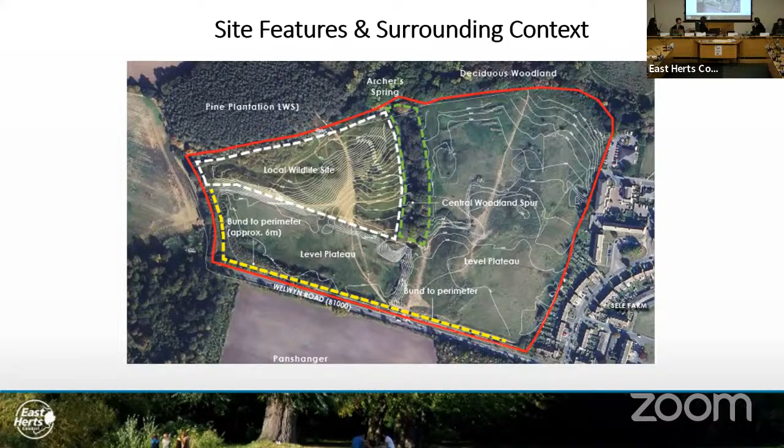This slide shows the site constraints and levels of the land, which rise from the east to the west, with a large dip in and around the designated local wildlife site. The levels across the site are steep, offering opportunity for landscape enhancement. There are surrounding woodland trees, key tree groups and specimen trees of good quality, which would be protected by landscape buffering, and the local wildlife site boundary must be preserved, yet has potential for enhancement.

The pedestrian footways and existing rights of way to the southern boundary maintain wider links to the countryside and Sele Farm to the east. Vehicle access options are limited, with only Welwyn Road and a link to Sele Farm being accessible boundaries. The Sele Farm boundary should be respected, maintaining suitable distances from existing properties. Views would be preserved to ensure the integrity of the woodland edge and to limit exposure of the site from wider views, especially from the countryside.

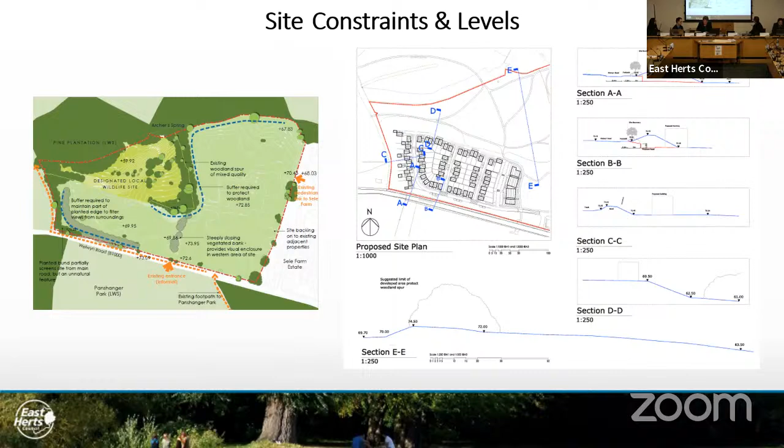The proposed development is for up to 342 units, with access and scale considered only at this stage, and appearance, landscape and layout reserved as matters. The site would deliver 20% affordable housing, equating to 69 units, with a tenure split of 79% and 21% in favour of affordable rent. 10% of the units would be wheelchair adaptable. There would be over 48,000 square metres of public realm and private amenity space, including 2,000 square metres of dedicated play space, with 693 car parking spaces plus 35 for visitors, and 342 cycle spaces.

This slide shows the strategic site allocations in Hertford town and the number of units, including HERT3, the master plan called Archer's Spring, which forms part of the adopted local plan, expressing the need to accommodate around 550 new homes in combination with the already consented scheme at Thieves Lane, for 254 units south-east of the site, shown in the middle image, which is currently well under construction. Archer's Spring forms an integral part of the wider allocation, building upon the headline target of a minimum of around 550 units and the master plan design concepts, showing the scheme is closely aligned to these policy expectations. It's important to note all allocated sites are high priority for housing delivery, ensuring the council meets its 5-year housing land supply, and this scheme would greatly contribute to that target.

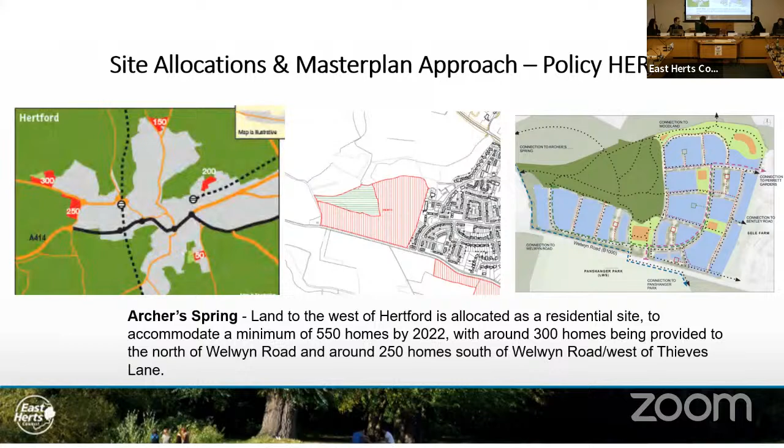This slide shows the design concepts of the site from a master planning viewpoint, with a comprehensive landscape-led design approach that tells a story of how to deliver a high-quality housing scheme at the urban edge of Hertford town, supported by positive design reviews.

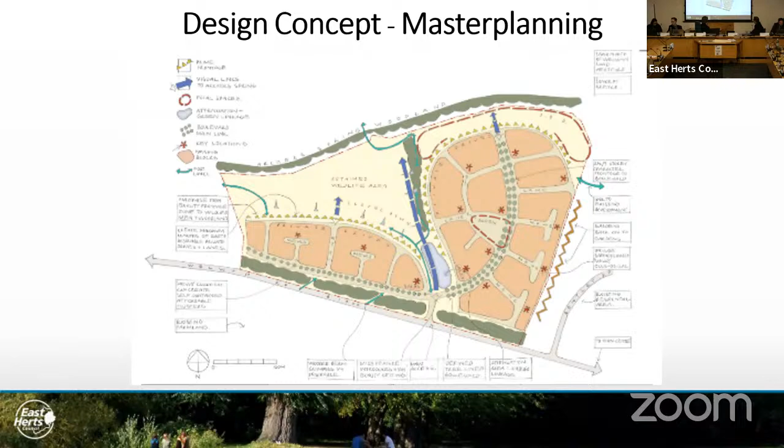This slide shows the indicative layout and scale of the scheme, aligned to the around 550 units, where this parcel and allocation adheres to high quality design principles including 4 distinct themes to ensure the site provides a beautiful place to live and visit: Valley Edge, Panshanger Gateway, Woodland Edge and West Farm.

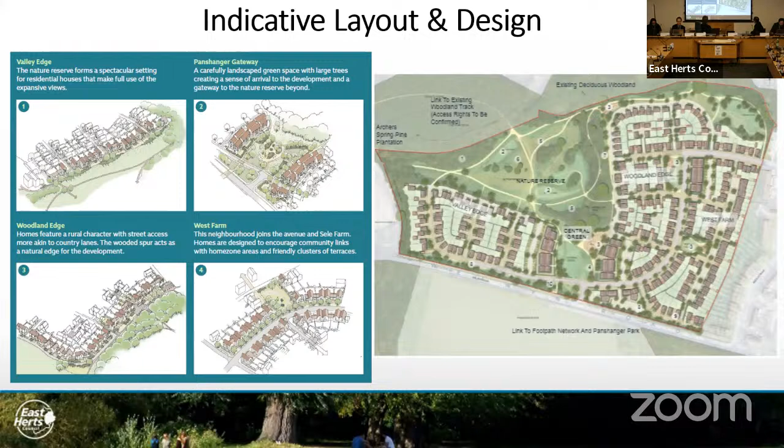This slide shows the indicative heights of the housing scheme, consisting of 2- and 3-storey dwelling houses and 3- and 4-storey flatted perimeter blocks, with a key shown there.

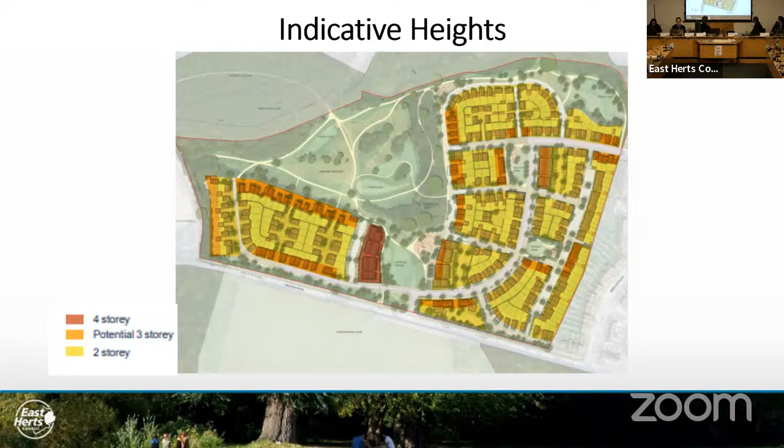This slide shows the parameter plans subject to consideration at this point, relating to access and scale only, and which delineate specific areas for housing and access routes through the site, with indicative layout and heights details.

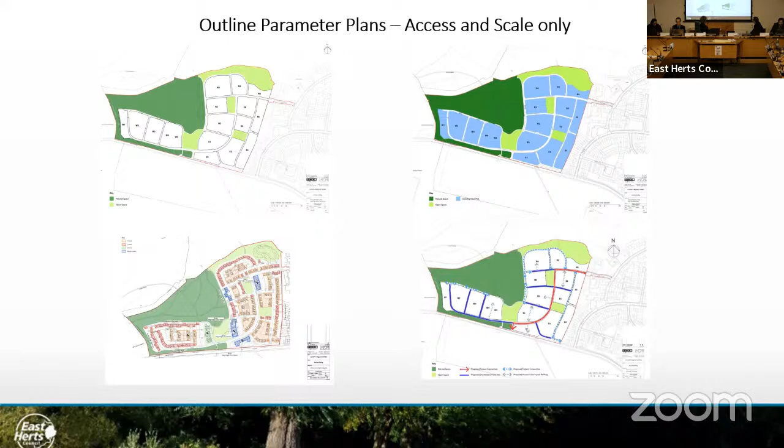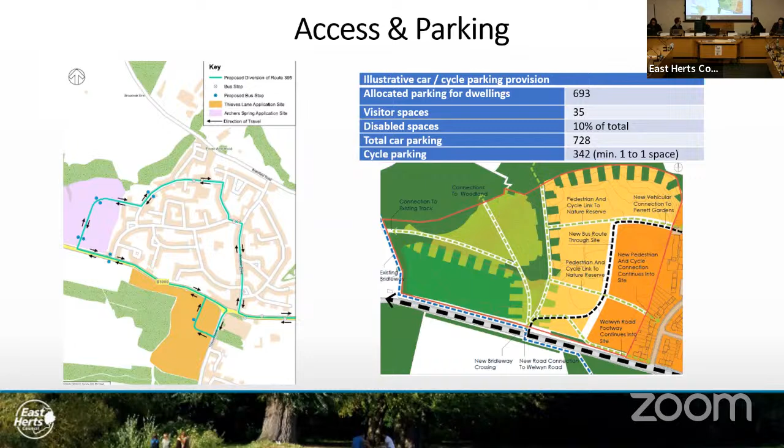This slide shows the junctions at Perrett Gardens and along Welwyn Road. The extended bus route and emergency services would have exclusive access and egress from Perrett Gardens, controlled by rising bollards. Along Welwyn Road, there would be a shared cycle footway encouraging active travel.

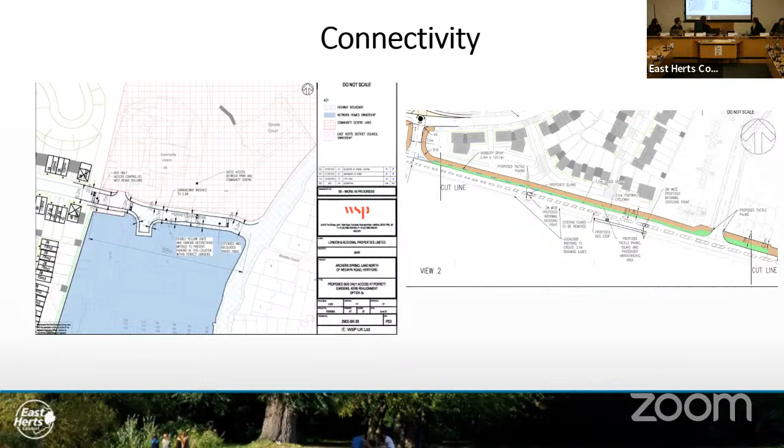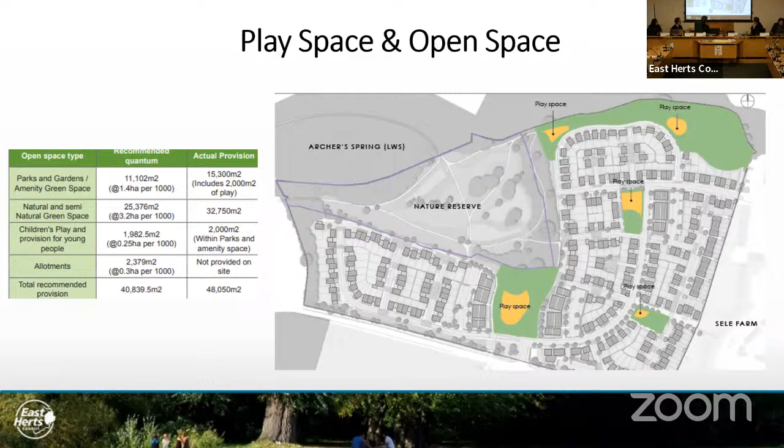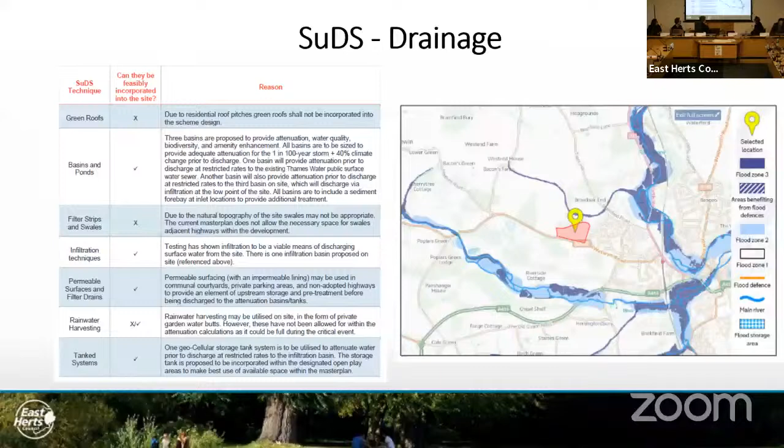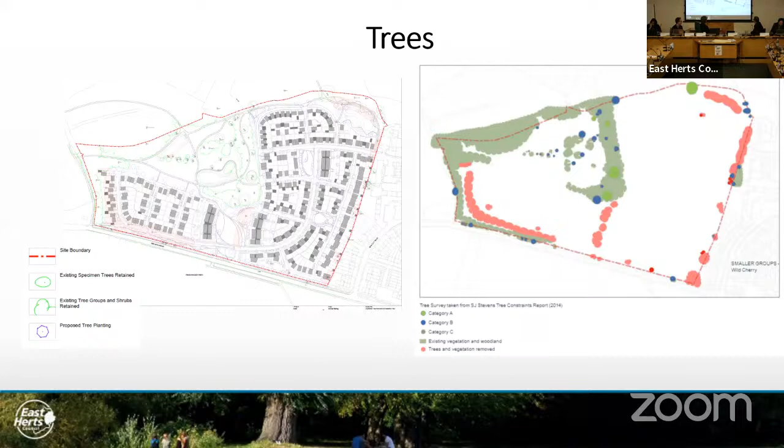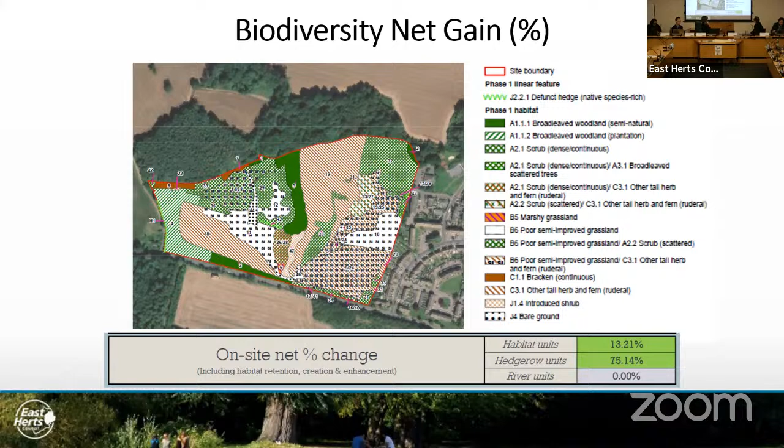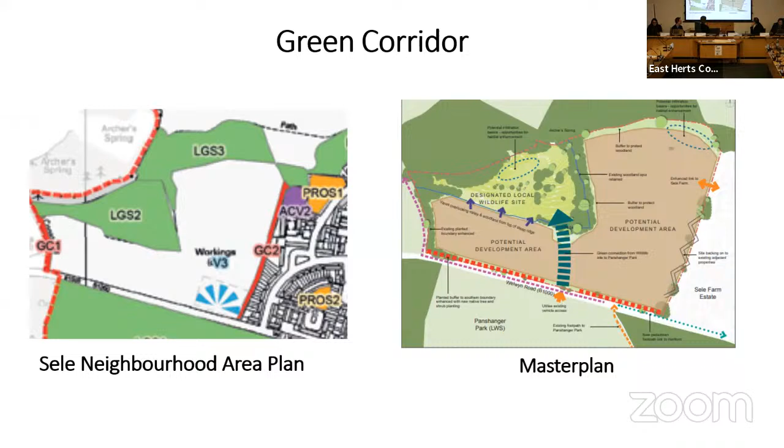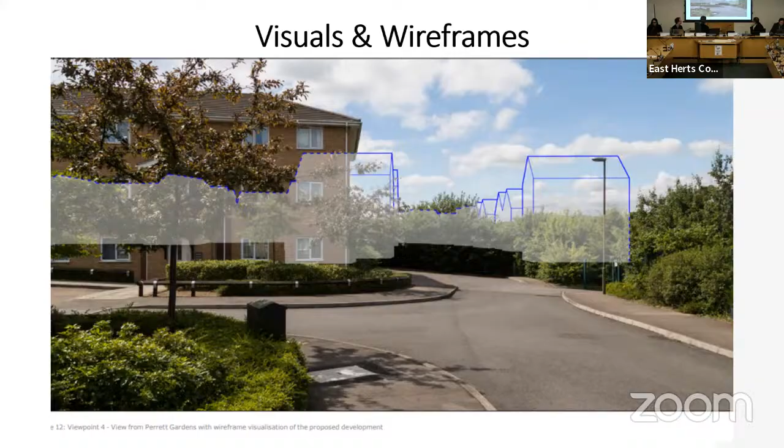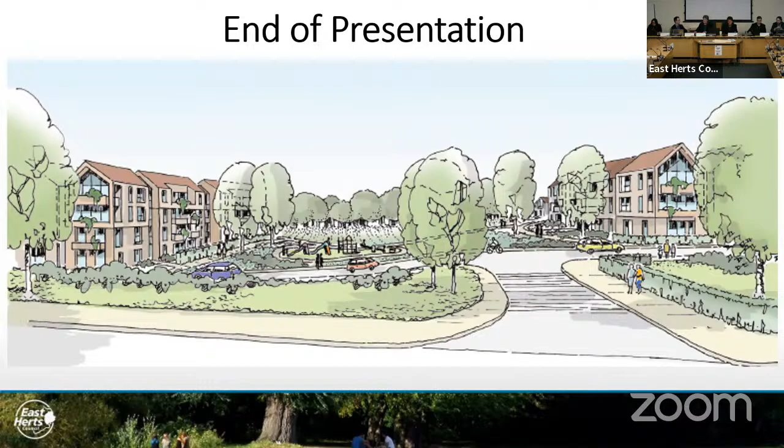So I'd like to now go on to our speakers to make representations on this application. First of all, I'd like to call Adam Leaf, who is representing the Sele Residents Association.

Hi. So when you're ready, press the button.

Good evening, everybody. I'm chair of the Sele Ward Neighbourhood Association. We evolved from a group of residents who worked on the neighbourhood plan - I've just got a copy here. We now represent all of the residents in Sele through the Neighbourhood Association. We've had 3 public meetings on this application, and we submitted an assessment of its compliance against the neighbourhood plan. We want the development to be the best possible for residents, old and new, and for the environment in Sele.

Thanks to the planning officers for addressing a lot of our concerns on things like contamination, drainage and SUDS. But now on to the outstanding issues, which are also in an email I sent to members yesterday. Affordable housing is essential for people to upsize as their families expand and for young people to get their first home. We know your hands are tied on the 20% with the viability, but it would be good to see how that's being compensated for in other developments so that our members can understand how to get houses.

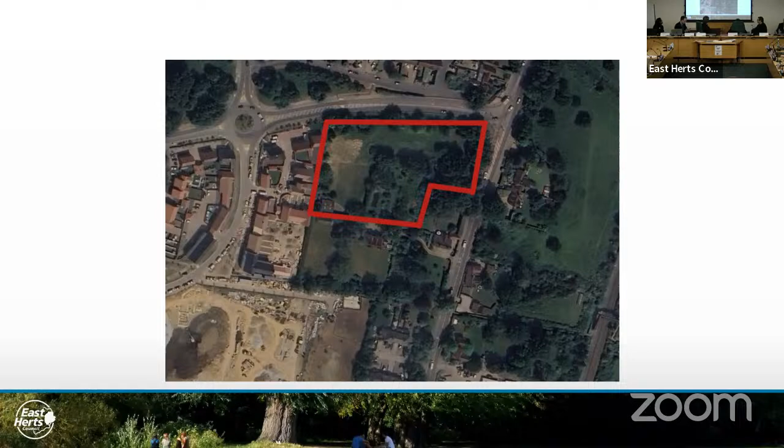Next slide please. That plan shows the context of the site with St James's Park, which members will be aware is a residential-led housing development with primary and high schools, an employment area, a local centre, and also a care home.

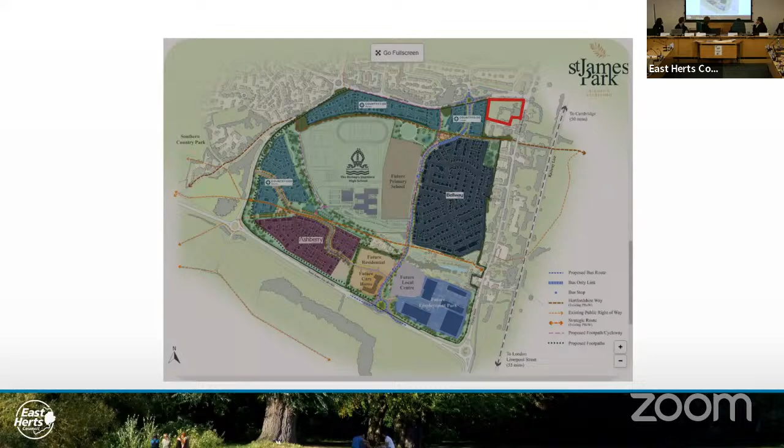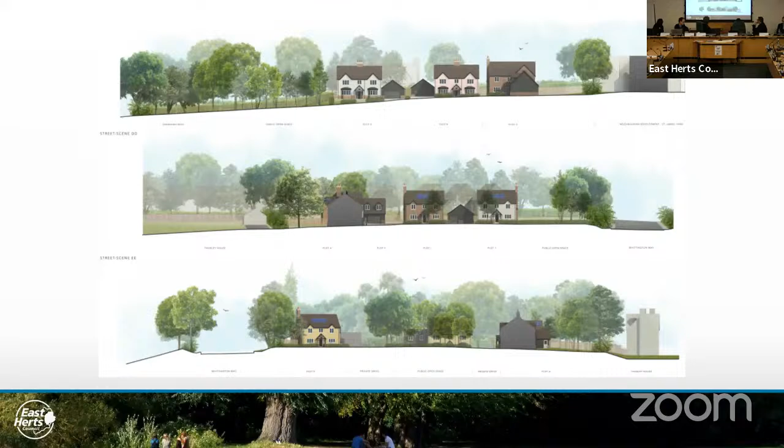Some further street scenes just to give a good indication of the development.

This slide shows the relationship of plot 4 in the development with Thorley House, the Grade 2 listed building. As members will note, it is going to be a subservient building to Thorley House in terms of height and scale. That slide is also useful in showing some of the existing boundary treatment which exists, and also the distance that plot 4 will be from Thorley House.

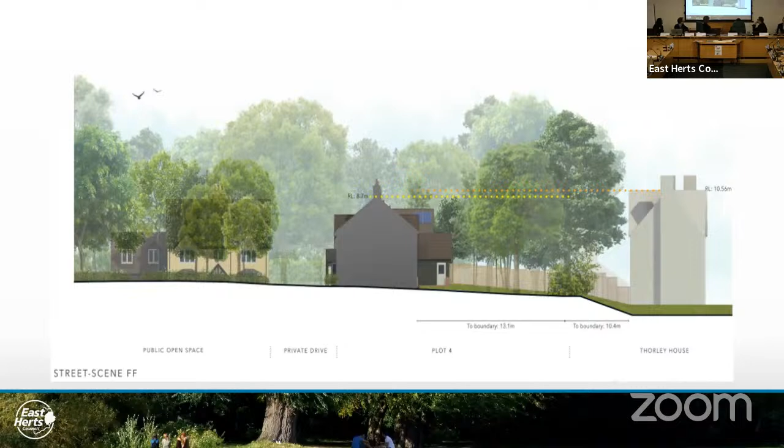We've got one of the elevation and floor plans for the development there, and again that's one of the other properties proposed.

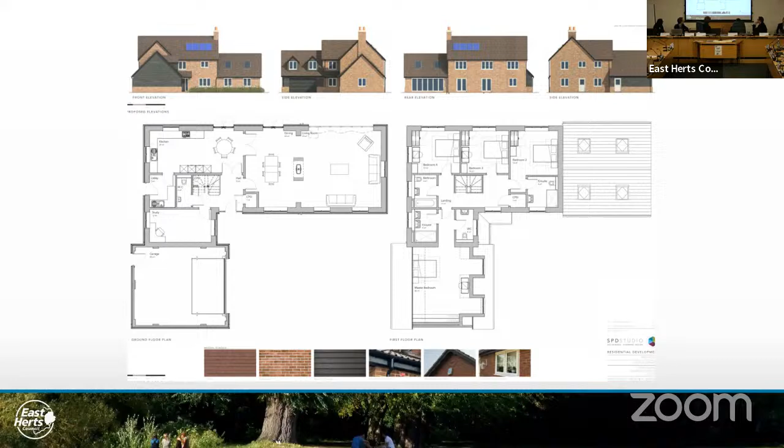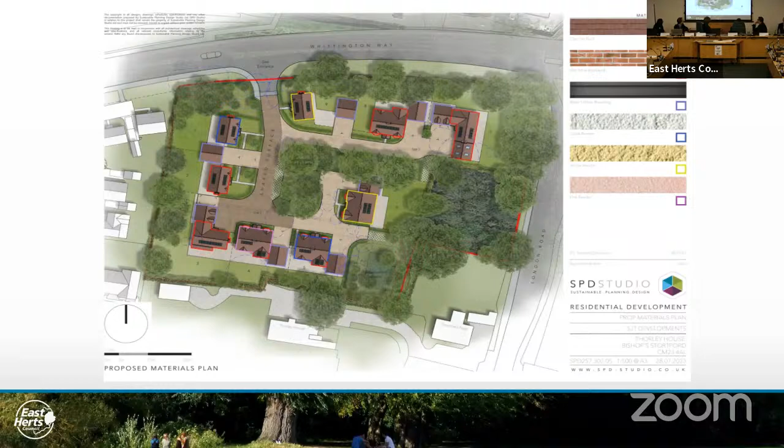This slide shows some of the materials indicated for the development, and they are red brick, plain tiles, and a mixture of render of chalk, yellow and pink. I just need to advise that materials are conditioned, so there will be detailed consideration of those materials at a later date.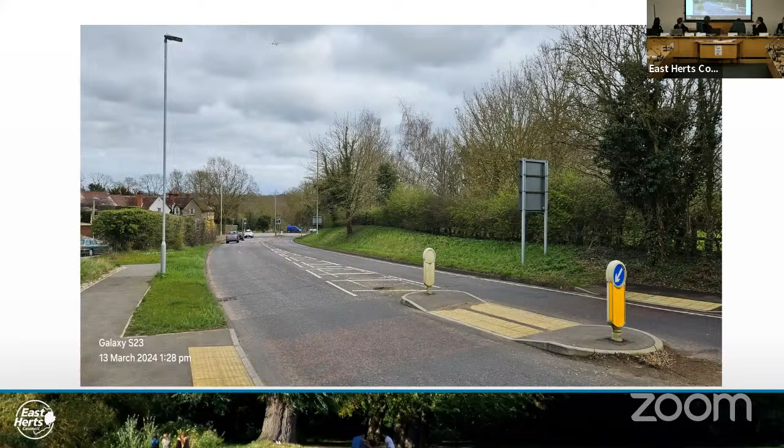This is a view looking the opposite way along Whittington Way to the west. The site is right in front of you there, and members will note it does benefit from a lot of screening. This view was taken, I think, in March time, but the site generally is quite well screened. Members will also note that the site is elevated from Whittington Way as well.